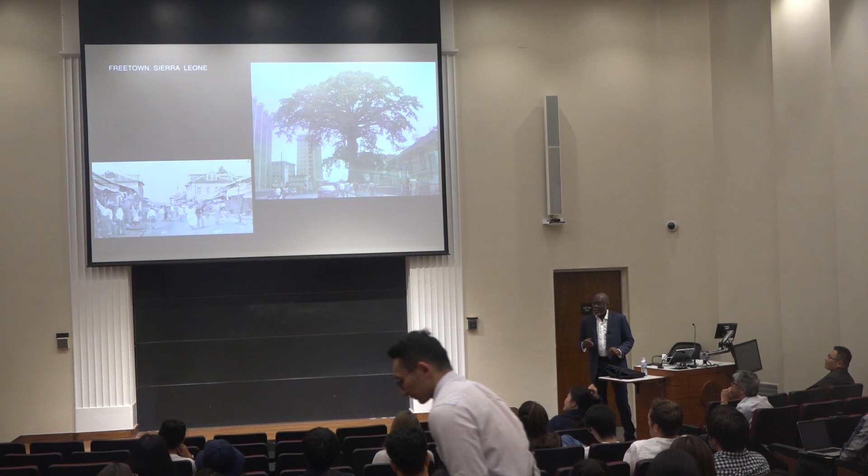I grew up in Sierra Leone, primary school in Sierra Leone, and I remember one time I had a fight with my brother, and we ended up destroying the ironing board in the house. So I spent a week drawing and making a new ironing board for the house. I thought my father was going to kill me, but he got back from the office, saw me putting this thing together, and he just joined and helped me put it together. Now, small things like that, as a designer and a creator, stick in your head.

Design to me is not just about fancy drawings or the idea of space and the usage of fill, colors. It's a lot more than that. And it's fascinating in my older years working in the States, trying to see the difference between Europe and America and some other parts of the world as well.

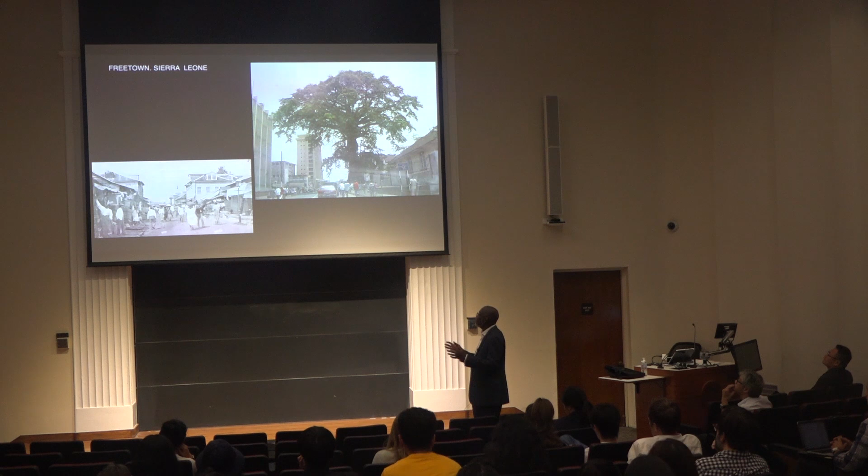My early years, this is Freetown, where I grew up, in the late 60s, early 70s, and the center of town is this cotton tree. It's always fascinated me that the whole town of Freetown looks up to this tree. As a young man, when it starts raining, it was a space for people to congregate, and when it's too hot, it's a space for people to congregate. Most of the buildings back then were sort of quite low. This was nature creating a space useful to people without any interference from human nature, apart from the fact that there's a building surrounding it. And it's still there at the moment, still a symbol of Freetown.

I did my secondary school in Lagos. I thought I was the hippest guy in town, always with my bell bottoms and afro, what it was like in the 70s. But growing up in West Africa, there was no hint, not a single hint, of you not being able to do what your dreams are, of trying to achieve them. You were always encouraged, and people were always striving to actually achieve their ambitions.

Now, I went back to the UK at the age of 16, and all my troubles started. Because in 1978, in my class of 72 in structural engineering, I managed to get into a university, because there was only colleges, polytechnics, and universities, and you had to get into a university if you did A-levels. I didn't do A-levels, I did a diploma, because every black person was pushed towards the colleges. They wanted you to be joiners, carpenters, bricklayers, but not professionals. But I was determined to be one.

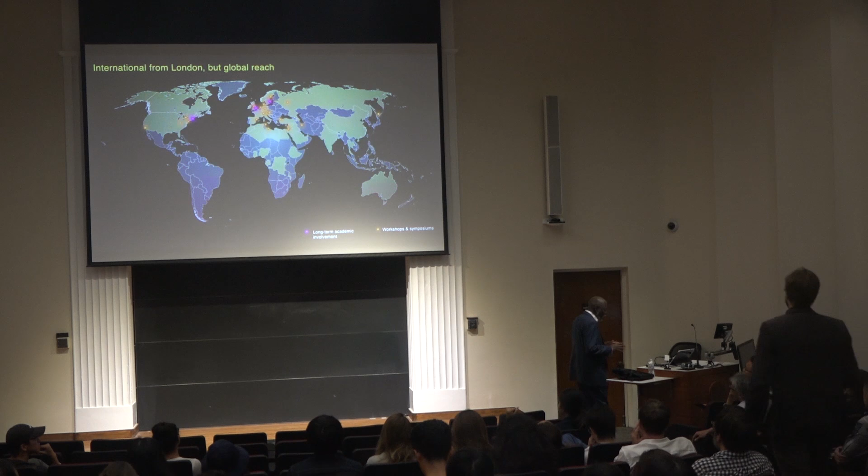As a practice, we actually run a unit at Harvard, an engineering and architectural unit. We're also at the AA, KTH in Stockholm, and always get invited to a number of universities, but I try and avoid as much of that as possible. My partner, Hanif Kara, does most of that. I just stick with the design.

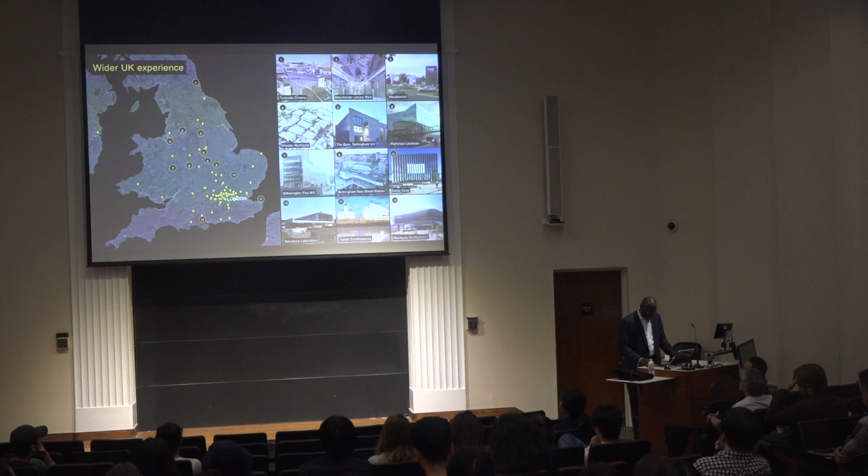In the UK, we're fairly well established, and I will go through this. In some parts of the world, we're just showing some of the projects - the Masdar Institute, Zero Carbon City, Phase 1, where it was actually generating more energy than it was using.

You got electric cars in there - it's one of the very first electric cars. Each one cost 1.3 million. This was before electric cars existed.

I want to use that to explain how I see design. Design for me is not just something that is taught at an institution. It's about who you are, how you see life, and how you experience not just life, but the spaces and people around you.

Understanding the wider ambitions of a client - as designers, you have to go way beyond what the client is asking you to do. You have to go way beyond the visions, and even what your lecturers are asking you to do. You have to be very true to yourself in your approach to design, and that's something I totally believe in.

I'm just going to go through these quickly - these are some of the projects I want to get to.

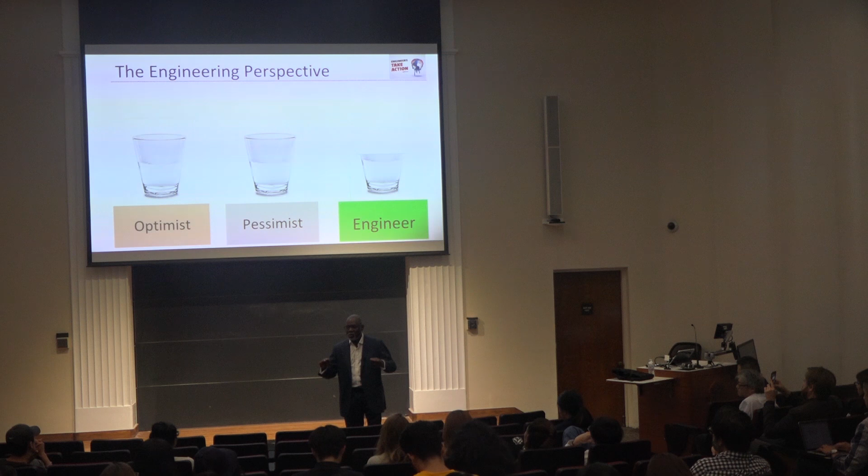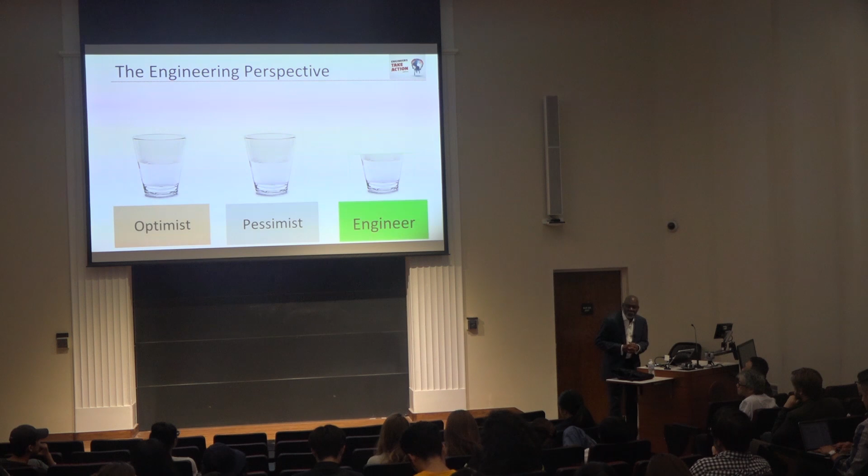As an engineer, you have to question everything. You have to be prepared to question everything - prepared to question clients, prepared to challenge the architect, prepared to challenge the codes, because people and society use the codes as a way of being super lazy. It is the lowest common denominator to do something, not the highest standard of how you do things. But people refer to that as a way of not making things happen. If you want things to happen, you have to be prepared not to be that way. You've got to be more level-headed and question either way.

Now I've got about four or five projects to try and explain some of these issues. I got a call to actually attend a meeting in San Francisco with Larry Page.

I thought I'll start with something in your neighborhood. I know it's quite a few miles down the road, but I suggested to actually come and do a master plan and design with Thomas Heatherwick and Bjarke Ingels to look at how we can create hospital quality spaces for his staff. It was to look at a series of domes. He'd been told he could do a kilometer dome with an ETFE layer.

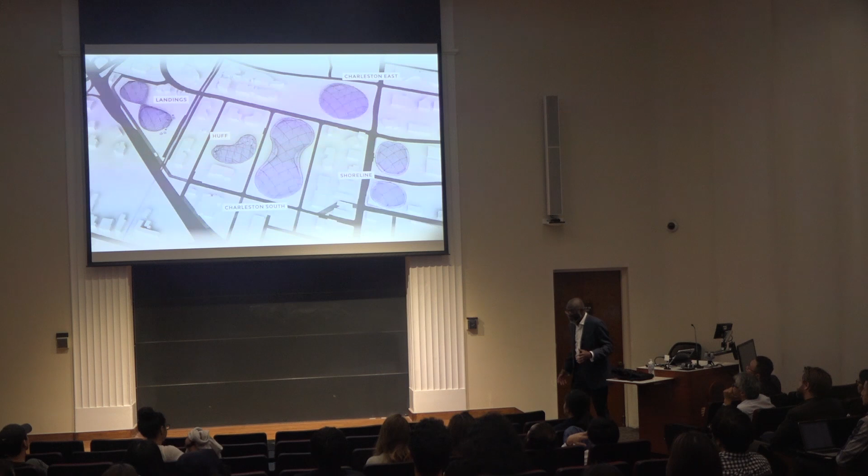This is where engineers will let ourselves down. This was to look at a number of domes, and the total area was something like 7-8 million square feet, quite big, on a series of domes — about 700,000 square meters, or thereabouts.

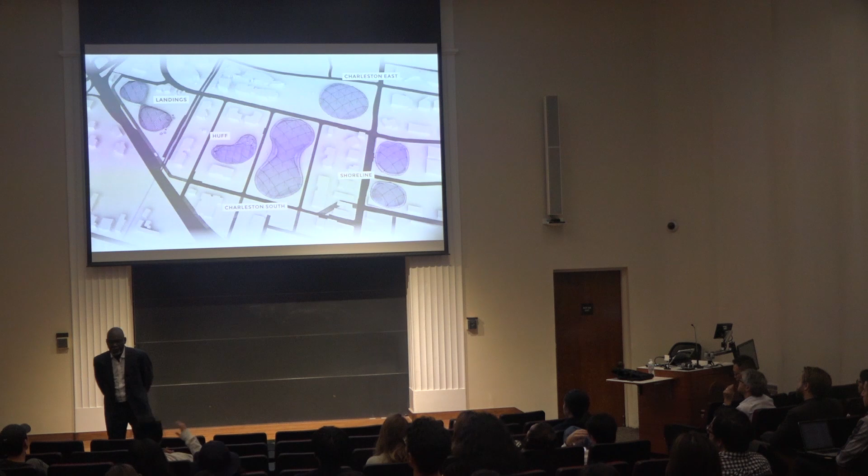So we started working on it, and it was clear that the information he'd had for a very long time was wrong. First, nobody questioned why you should have domes. On the West Coast, you guys have got some of the best air quality in the world, really, for your towns and cities, this mountain view. But he still wanted hospital quality, and that needed to be challenged.

For about 7 years he'd been told he could do a kilometer dome with layers of ETFE, and I just told him, no, it can't happen. It can happen in another 25 years, but right now we haven't got the material, the engineering, or the know-how to do it. That didn't go down very well, but it was a good starting point.

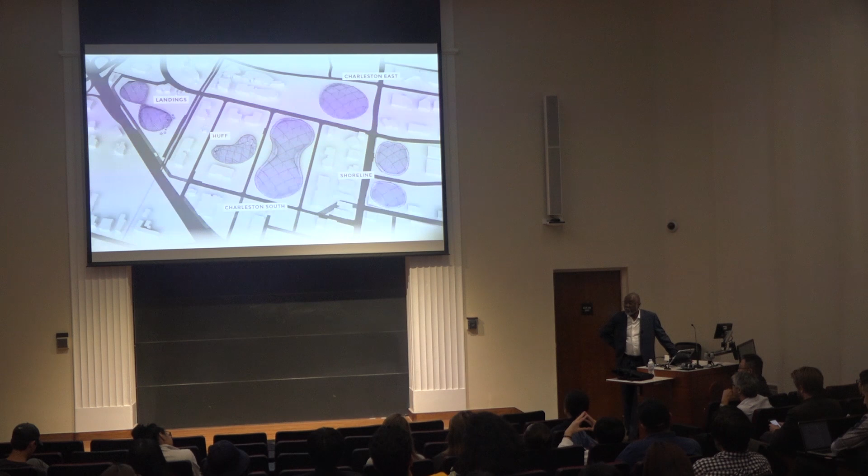We end up — and the idea was about Mr. Fuller's approach of trying to create this mega dome where you can have everybody inside it — it doesn't work. It's not sustainable. The energy you need to hold something like this up is just off the scale. And the implication to the substructure, to the ground, is also immense, which you don't see in beautiful sketches like this. It's an idea. Reality's got to come into play. But that doesn't mean you cannot attempt it.

So we were looking at domes, and we were asked to look at — we did a master plan for all of it, and then we were asked to look at about 2 or 3 of the domes, and this was one of them, Charleston South, which was the first one.

I'm going to be a bit naughty — I'm going to name some of our competitors. We were told very clearly that our partner is going to be Arups to deliver our design, and they struggled.

And the issue here is that you need to work in collaboration, and it's not in the DNA of your industry in the US at the moment. There's a really massive divide between the architect designers and the engineers. Trying to get them to actually sit down and work together is pretty difficult. Anyway, I'm going to go through this very quickly so you can see the way we think — the way I think, the way AKT thinks.

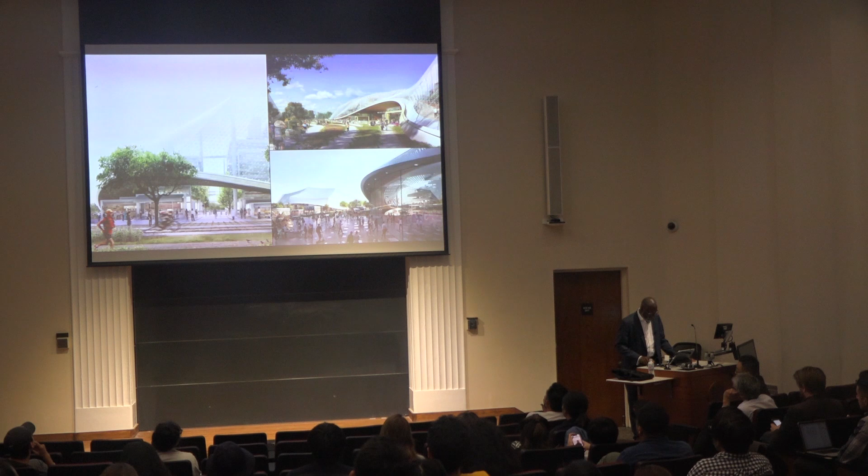15, 20 years ago, trying to convince a developer to keep a building was a nightmare. So we have to change our approach to some of these. But what they were proposing internally looks incredibly beautiful. But I would hate to actually go back and do the energy calculations on this - it was off the scale. So our task was to actually go through some of these and see our possibilities.

Working with our p.art team, we actually went through a number of approaches using in-house written programs and scripts to see how this will perform. Sorry, it's not doing what it's supposed to do.

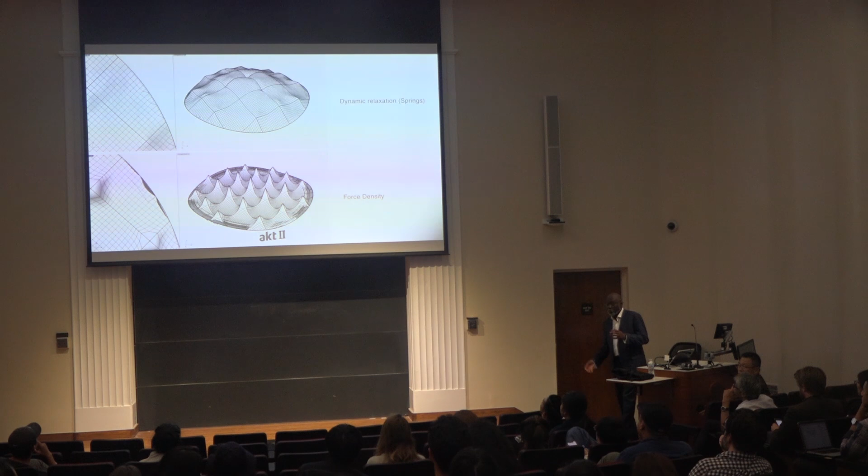So what we tried to do was look at dynamic relaxation as one of the options, and force density - too much technical stuff, you don't need to worry your head about it. But the whole idea is, how do we relax this thing so that the amount of force we need to create the form is minimized? There's a lot of criteria to make this work, but how do we make it as little as possible? Because when you create a tension member, you need a counterforce to hold it in place. And the implication on that, as I said, on substructure was huge.

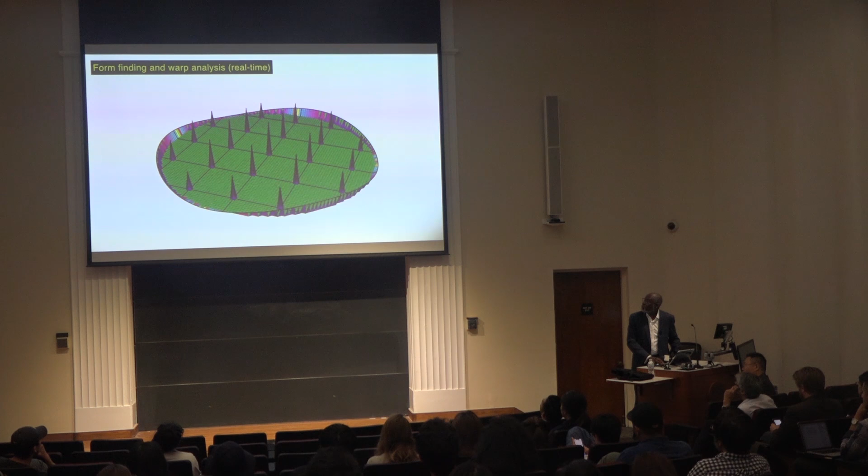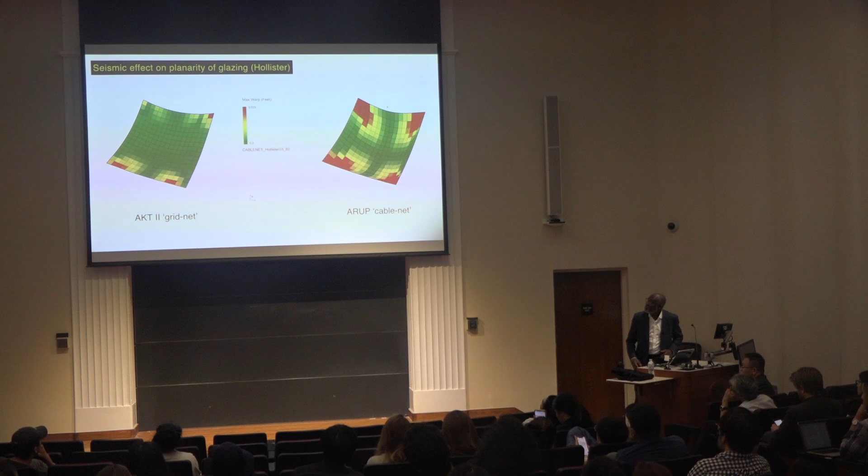So we went through a number of processes, also to reduce the stress diagram. The red areas show the higher stress areas. How do we change the geometry we were given by the architect to minimize the amount of force we're using to create the shape, which means part of the geometry changes - but I don't think that's too much of a big issue. So we went through all of that, not just from a micro level, but also a macro and a micro level, in terms of how we change the idea of a tension structure.

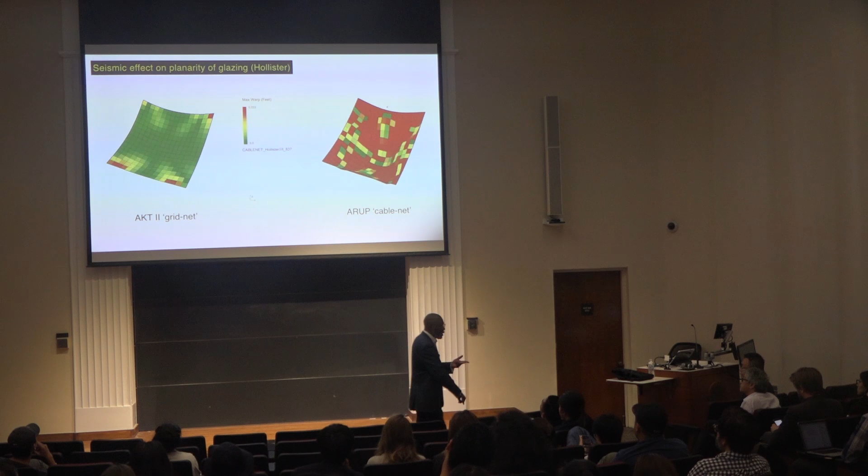So on the right is a cable net. On the left is something we call a grid net. What we decided was, rather than using cables, we use flats, because by the time you align the flats together, it actually has more stiffness, which means it's part bending and part in tension, which means you're minimizing the forces and the energy in the system.

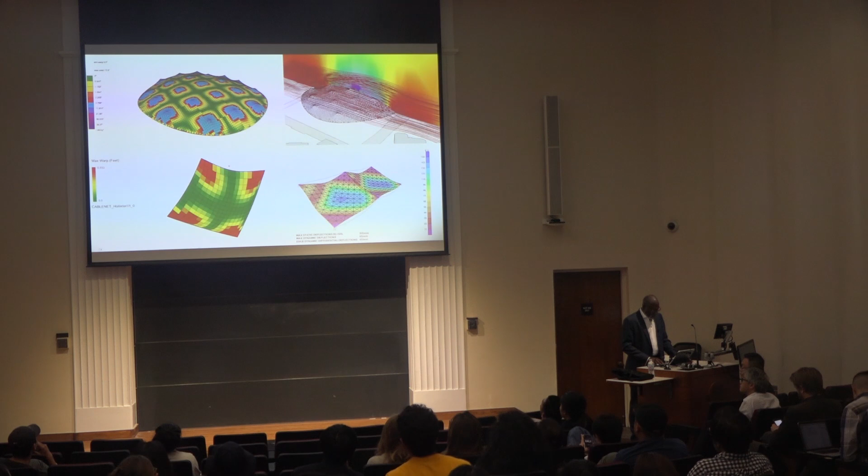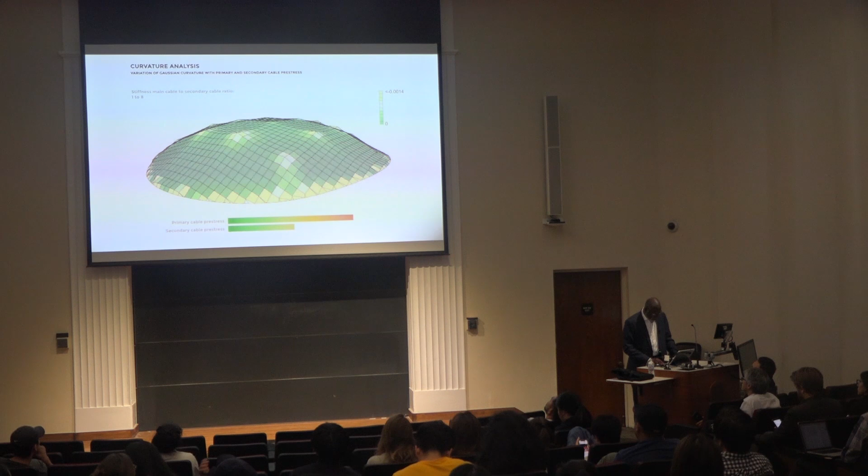And we had to go through all the usual analysis - wind analysis, left, right, up and down, different kinds of forms to make sure, as you can see at the bottom, the amount of force you need to create the shape. We presented all this to the client to say, look here, as soon as you create more force, you're using more energy. If you're using more energy, not a good idea.

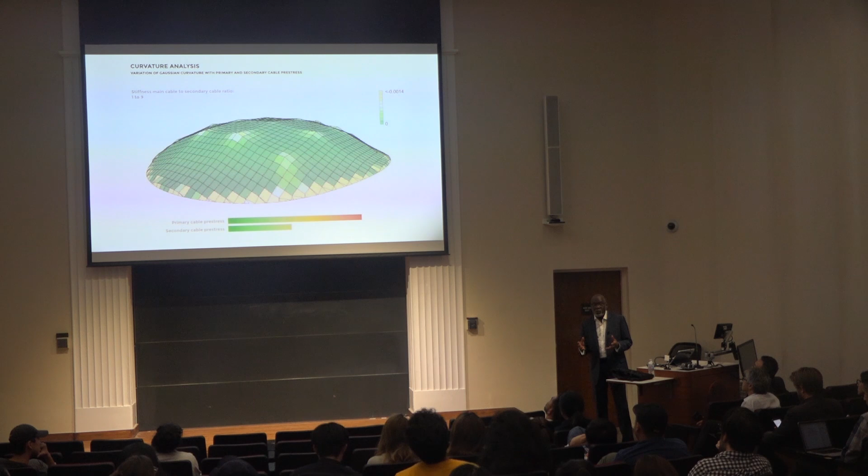So rather than playing the black art or the black magic of structural engineering, which is what a lot of engineers do - you say to them, I need a beam across this space, they say it's going to be this deep, it's going to be that long, and nobody questions it. Why is it this deep? Why is it that long? Why does it have to be rectangular? Why can't it be twisted? Why can't it go like this?

We don't - and I'm sorry to say, in the US, they don't question it enough. In Europe, you have to actually give your reasons and let people understand more and more what you're trying to do and why you're trying to do it. You've got to be challenged.

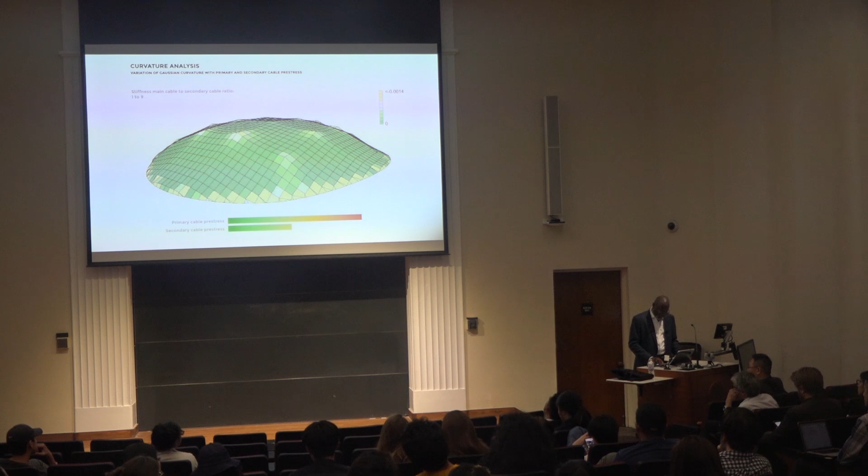Moving through quickly, we went through all of this - these are some of the details on the cable option. By the end of the day, we abandon it, because as soon as we convince the client that it doesn't quite work. So we spend about 6 months working through all of that.

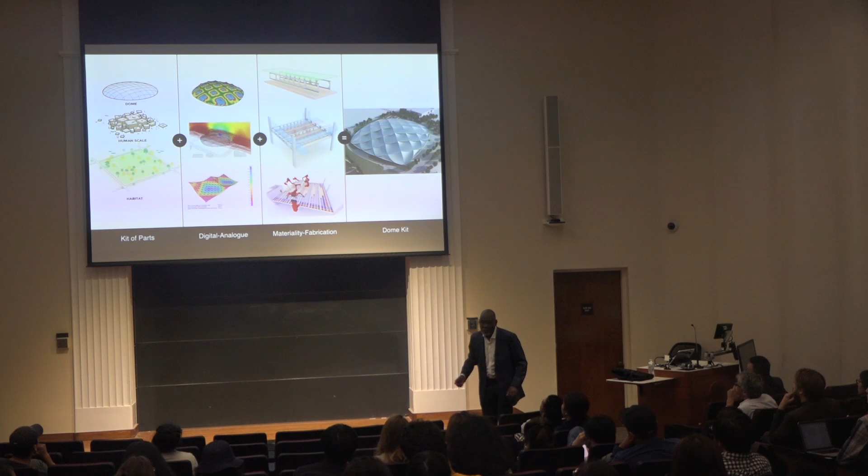We spend about 6 months dealing with all of this, and then we spend the other 3-4 months, and this is what we ended up with. To actually bring the light levels down in this part of the world, it's something like 6 times what it's like in Europe. So you have to bring the light levels down, manage solar gain, and all of that. We end up with, forget about the clear structure in glass or ETFE, we end up with solid lenses of light coming in, which actually created a beautiful space.

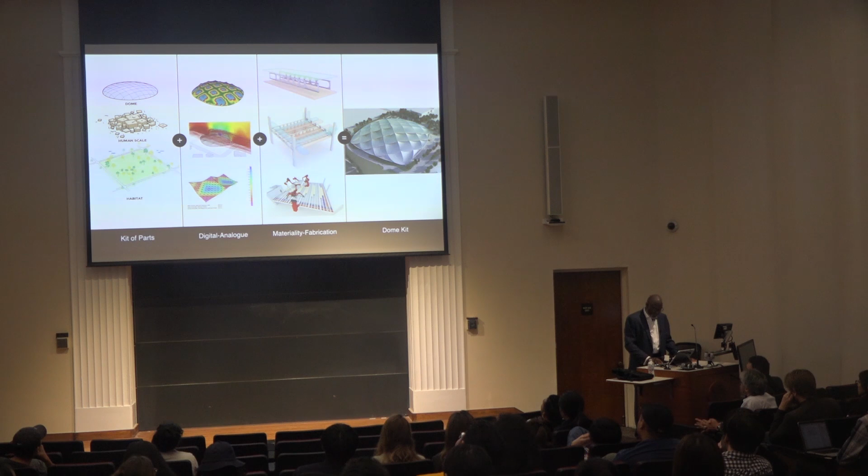Went through all the usual analysis, went through the usual materials. We tried to do it in timber, but the area in the floor plate was too big. The other thing is sustainability - you have to use materials for what they're good at. I read in the press about people trying to do the tallest tower in timber. That's its biggest folly. Timber was never made to do more than 10 floors, because the amount of steel you then have to put inside the timber to work in composite with it makes no sense.

But we can all write and put something in the press to say we've done the tallest timber building. Sorry, I'm not an advocate of them.

Again, this is looking at design in a holistic way. The client on this rang me and said, look, there's this site with a building built in 1976, brutalist, on the market, down to the last 4 bidders. What do we do with it? There's planning permission to demolish it and put 5 mini towers around the site. So would you come take a look at it? The original engineers, who I won't name, did the assessment for it.

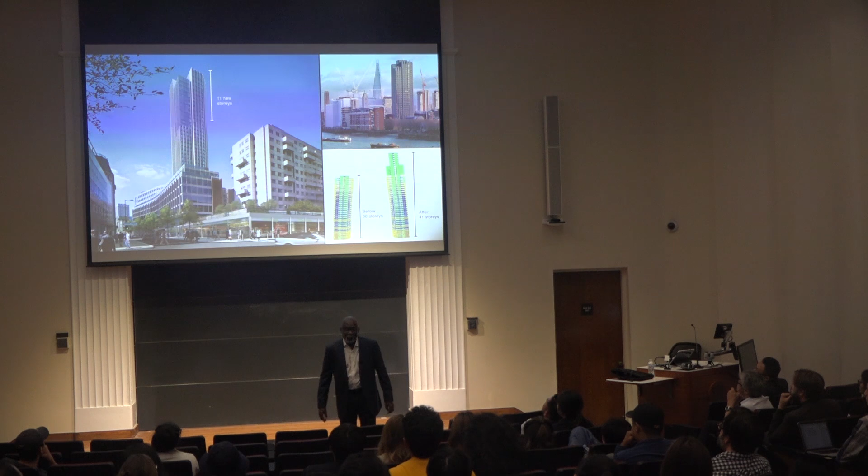I love this project because we had to convince the client that we could put 11 stories on a 30-story tower without demolishing it, which is 30% more. Everybody got excited about that. But the lower building is 6 stories, and we added 3 onto it - 50% more. We did not touch the foundations.

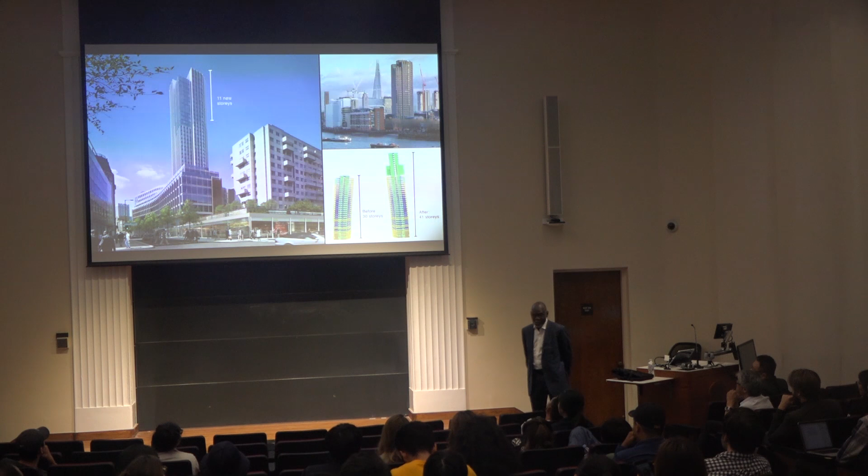We only strengthened columns where we created double height spaces in the lower areas, and the columns in the tower, we did not strengthen any of them. We even cut holes in the core to convert it from a commercial core to a residential core. So what we ended up doing was with this existing building - you can see the T-shaped building next to it - it's all commercial, the whole thing was commercial.

So all of this and all of this is the site - the whole thing was offices. What we created was: the same area you've got here went into this level, which means from this level here all the way up became residential. And all the lower areas here, for the big axis, became retail spaces, a destination space.

So we convinced the client - I first said to him when we went, he asked how many stories do you think you can add? I said 8, give me 24 hours. After a while he came back and said the figures don't add up, can we do more than that? I said well, we haven't had time to do the numbers. We did the numbers, and to tell the truth, he could have gone up to 13.

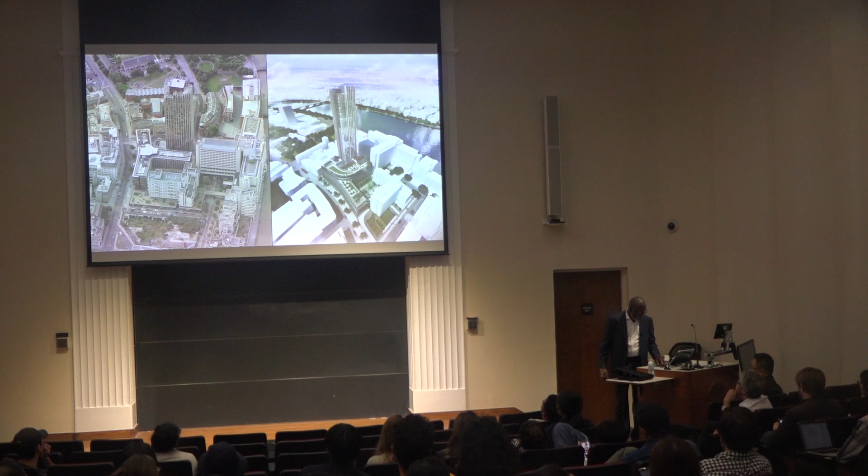But actually changing the load path and understanding how engineering worked back in the 70s - it's built, it's up. Why? The architects are American architects, KPF, and we work very closely with them. But why? Why do it?

There's another one we're doing at the moment - sorry, because I really love this project - which is a 17-story building, and we're adding 13 on it. Again we're not touching the foundation, and that's on site at the moment. We're increasing the core.

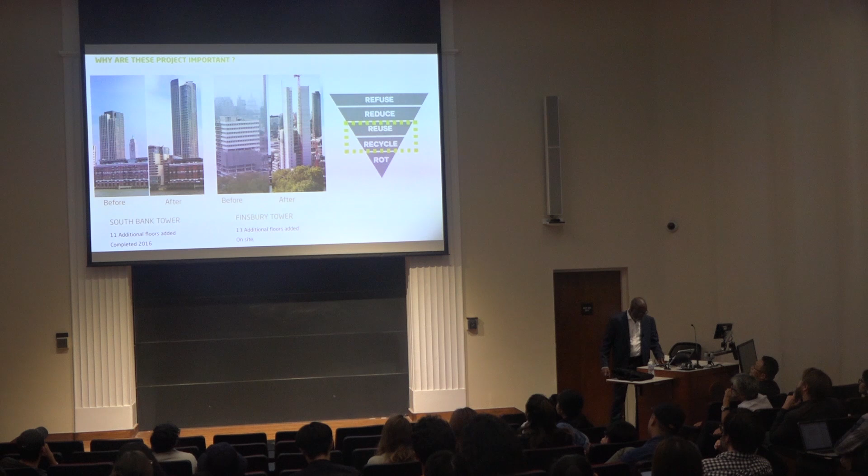Look through the existing, understand what was done, understand the vision. We spent a lot of time understanding the vision of the original designers, a lot of research. Why did they do it? What were they trying to achieve back then? What kind of building was he trying to do?

Now what we have to do is adapt buildings. Everybody talks about, I'm sure some of you are going to qualify and go into the industry, I guarantee you they're going to be talking about wanting a flexible space, a flexible this, a flexible that. To me that is ridiculous. Why spend the time, money, energy to do a space when 90% of the time it never gets used for the flexibility? What we should be talking about is adaptability.

So if I decide that this hall is not big enough, I'll knock that wall down, I'll redesign the corridors, and I'll make it work. I'll get the engineers in and I'll make it work. Why spend the money and energy to create this wonderful wall, put big structures in there, make it so you can blow it off in terms of flexibility, and it never gets used because 80-90% of the time, flexibility never happens.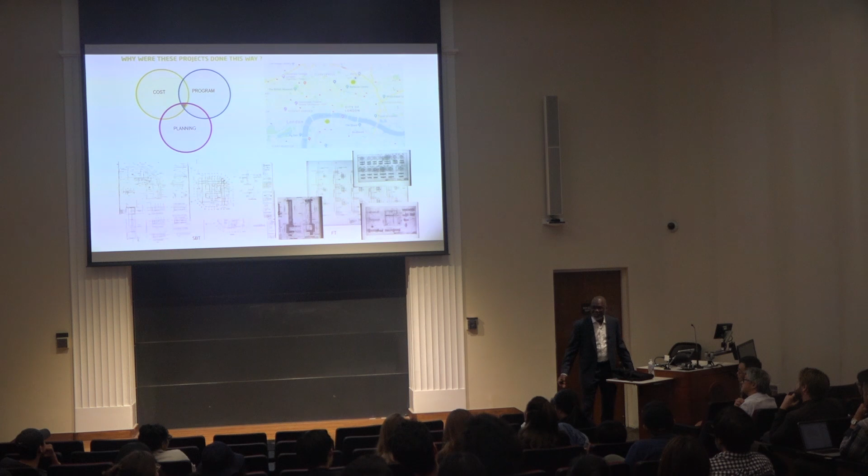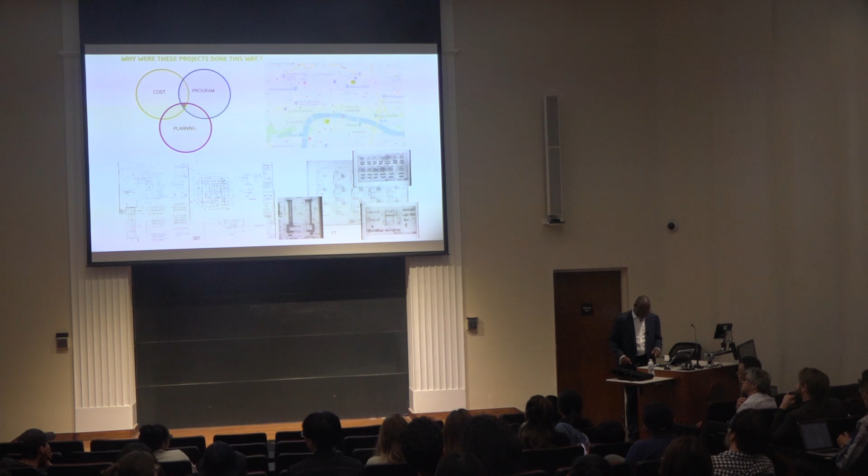So it is the most stupid statement we use in our industry from a design point of view. So my view is, change that word. So what we did was we...

Post-tension the existing core, not by putting cables in it, not by tightening it up or anything like that. We just dump more load on it. We dump more load on it.

Because when it was built back in the 70s, they used the core to support the building. So the lever arm was the core. So what we did was we changed the core by having every single floor act as an outrigger, so that the external columns and the core are working together by increasing the lever arm.

By dumping more load onto the core, which was designed to go tension, compression, tension, compression, it never goes into tension any longer. Concrete is beautiful in compression. Concrete does not like tension. The only reason you use it for tension is you pour a lot of reinforcement in it to make it work. Stupid, stupid, stupid.

Seriously. So by having this dialogue with the architects in terms of what they were trying to do for the future of it, we had the biggest row. I had the biggest row with the contractor, which was Mace. So much so that I was having a shouting match with the chairman of Mace at a meeting, because I told him, not in so many words, these guys were morons.

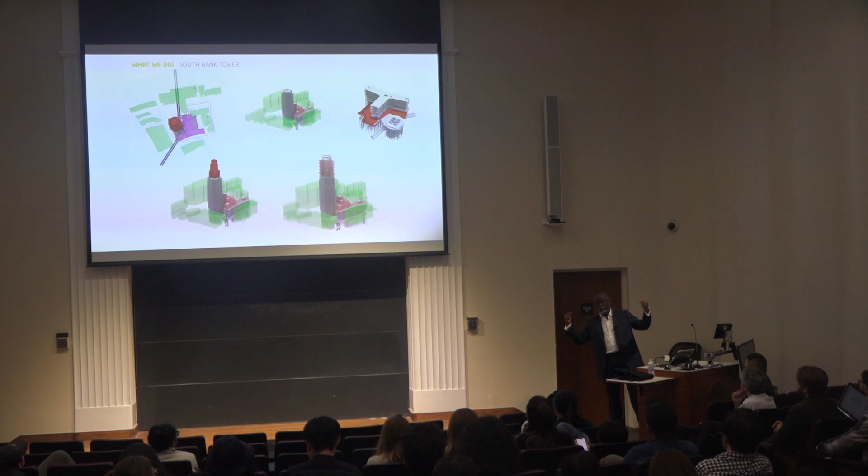Once it's built, they use this as contractors to say we are now the number one engineering building contractor in London because of this building. So I do believe as designers, we are in a position to help change the thought process of the industry.

I was dragged to a planning meeting where the borough next door, Westminster, objected to this building, not from a planning issue case. They said it was a piss take. It was like an April Fool's Day joke.

Trying to do a tall building in Southwark opposite Westminster, they said it was not possible, that the client and the borough were taking the piss against Westminster. And the borough said, yeah, we've got a finger up to you guys, we're the next borough across the river.

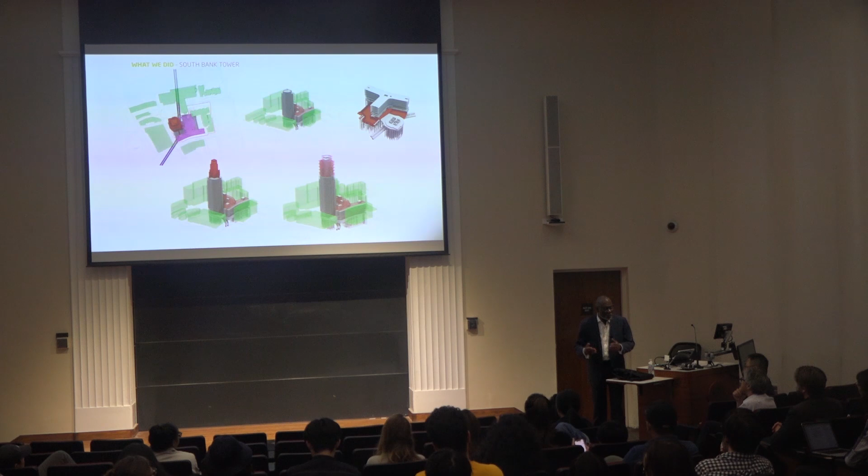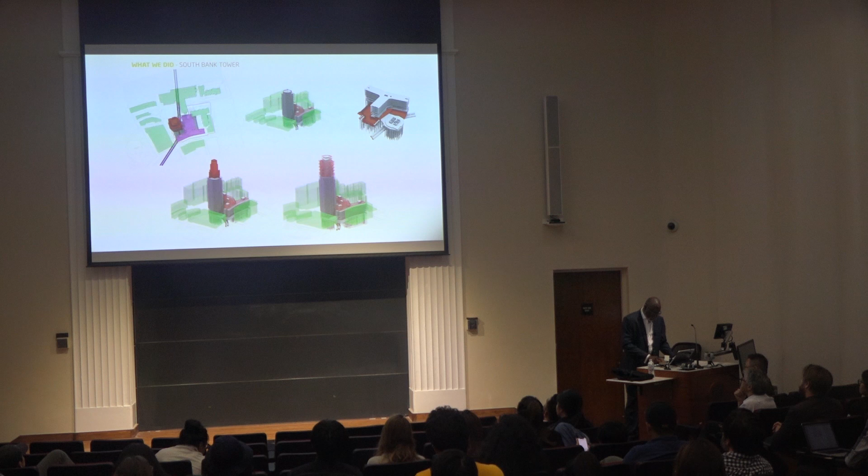But it was real. So I had to go and explain that, no, we are actually going to do this. We are going to make it happen. So I do believe as designers, we do have a thing to do.

So this really simply explains it. So you've got the core, and rather than the core doing all the work like in the original, this just shows the force diagrams, and this shows the complete picture. So you can see the original force diagram, it's got some tension. This is if you use the core, and again you're creating a huge amount here.

But by actually increasing the cantilever arm all around it, you actually keep everything in compression.

Right, so we keep everything in compression. By the way, we had a tube tunnel underneath as well, a small port. It's all on piles, but we did not touch the piles because the capacity we designed the piles to, again, is criminal.

A lot of wind analysis, and this gives you an idea of the carbon footprint. This is South Bank Tower, and we've used this to give us some relative references. So AKT's footprint, air flights we do, how much meat we consume, average city worker, our computers—you can see the difference, and the amount of carbon saved.

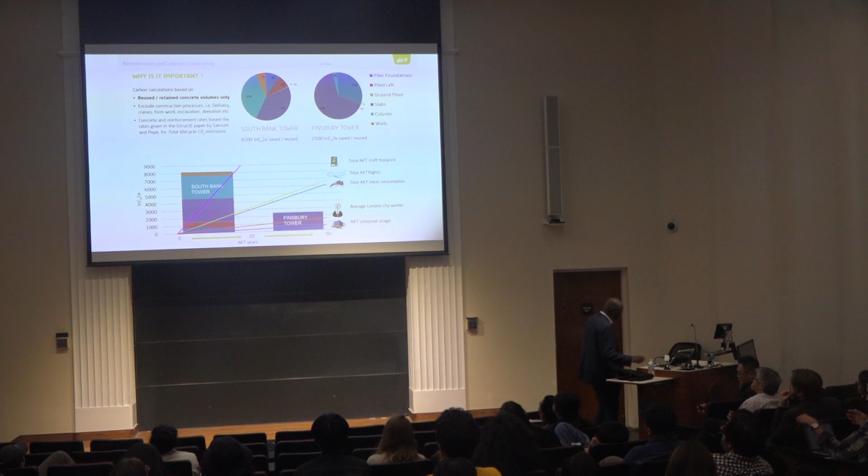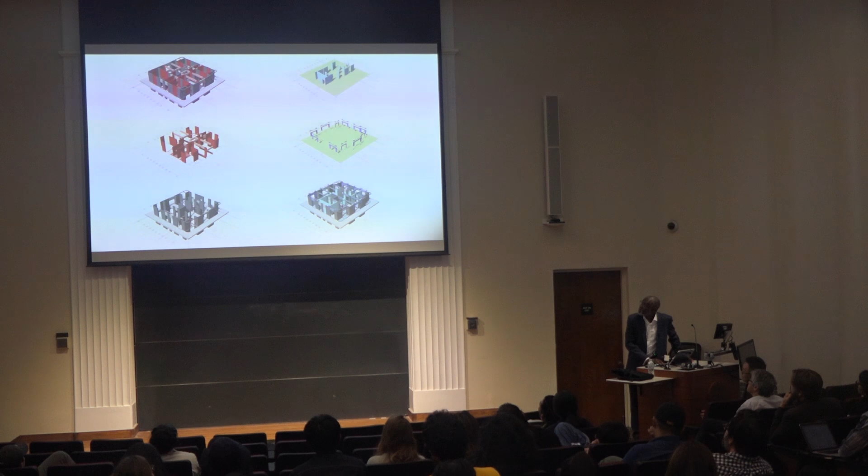This is the core, quite fascinating actually. We took the original core, in red, and literally tore it to pieces, added some new bits to create a toilet and kitchen in those spaces. The reality was we actually made it stronger, at 107% from the original 100%.

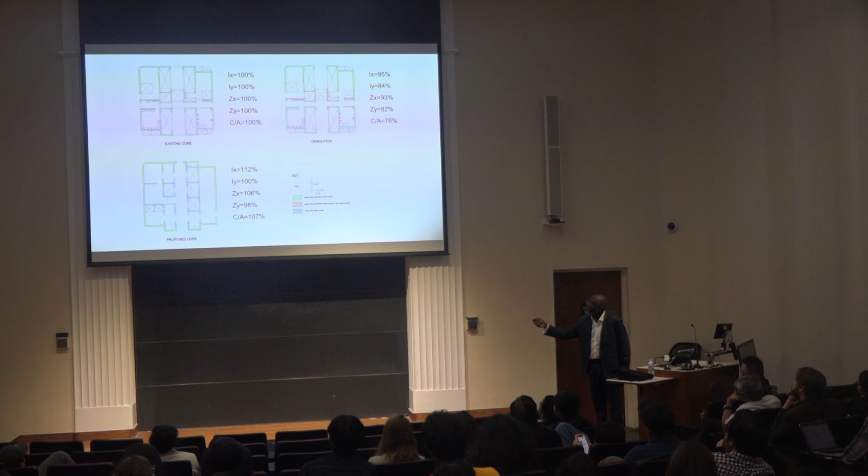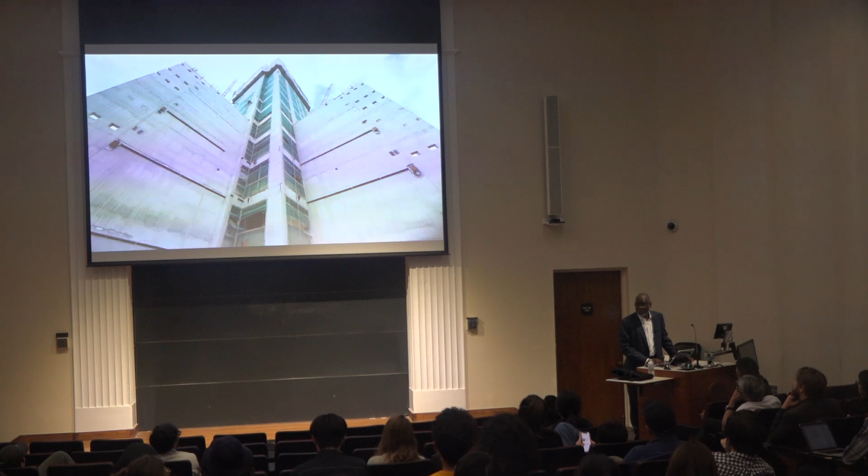So anyway, this is it going up, as you can see. I'm not joking why it was going up—London thought it was a piss take. They did not even believe it was going to happen, but it's done, it's finished. This is the final product.

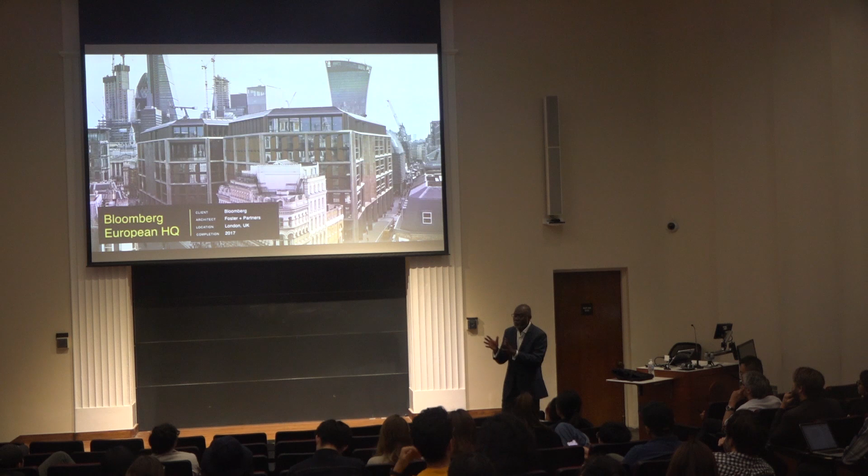The internal is beautiful. I can remember the Channel 4 TV rang up and said, 'We'd like to do a program on this thing and have it on TV.' The client got so excited, and he rang me and said, 'We're going to do this program.' I said no.

I said, 'You're selling some of these spaces on top for a lot of money. How would the client who's bought this beautiful apartment feel, sitting there knowing very well that next to him there's a tension pile holding the whole 11-story extension together?' They don't want to know how it's built, they just want to know it's built. You don't want to tell them how it's done. So we decided not to do it.

This is Bloomberg. I've put this one on because it's got an amazing design story. Michael Bloomberg decided that he wanted, in the city of London financial center, having done his business very well, to create a special building. Norman Foster was the architect, and the chief planner of the city said, 'I do not want another Foster building.' Norman Foster said, 'I'm not going to give you another Foster building, I'm not going to give you steel and glass, I'm going to give you something else.' And he did.

Technologically, this is the first office building to hit BREEAM and LEED Outstanding. The technology in this building is amazing. But when you've got a client that's prepared to spend over £1 billion on a 1 million square foot building...

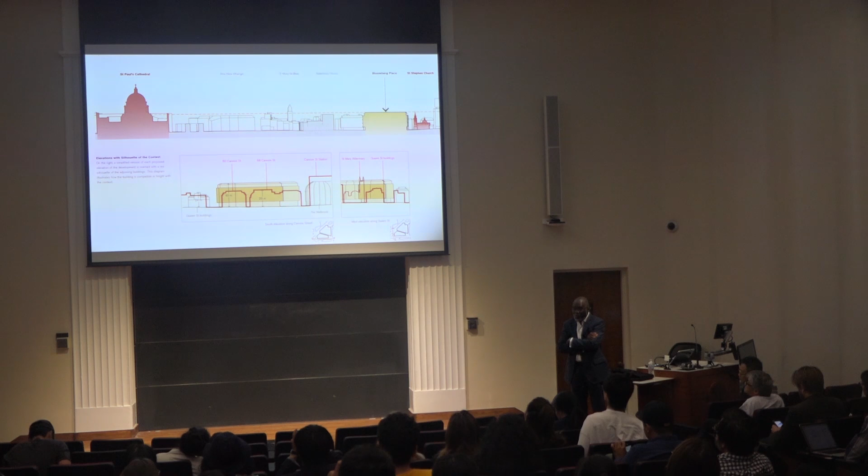People will question that, say why are you spending £1 billion on a 1 million square foot building? He's got the money, let him spend it. If he's going to use technology and funds to actually create a sustainable building, go for it. Why do we, as designers, have to think cost should be a reason to do a bad design? Whether it's 20,000 or 200,000 or 200 dollars or pounds, if you're going to do a piece of design, you better do the best you can for the amount. It's not about the money, it's about how you're trying to create something that is sustainable and environmentally okay.

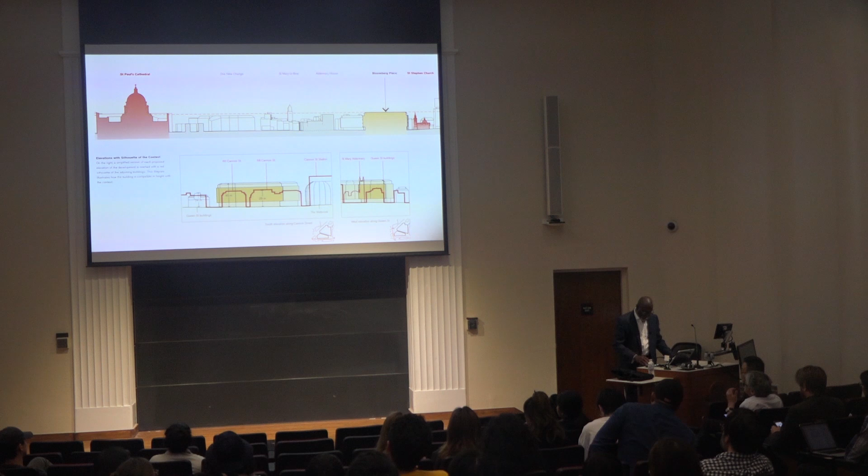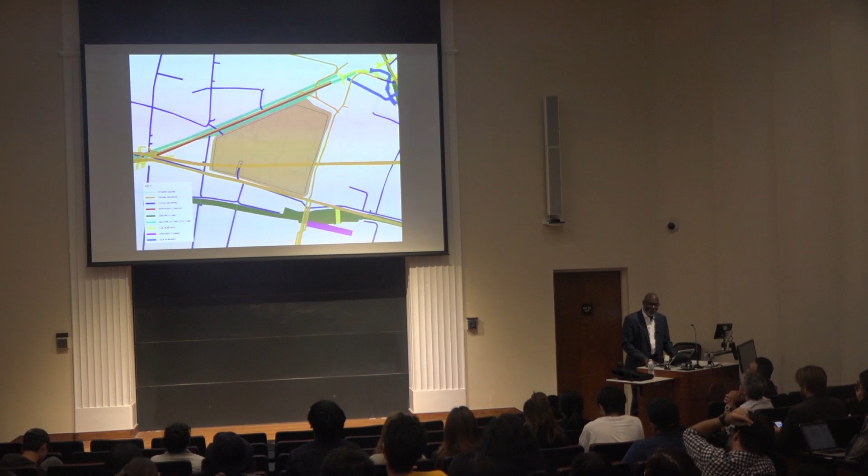So the trick, the beauty on this one—this job started, oh boy, a long time ago. The practice was 50 people when we started it, so something like 12 to 15 years ago. I can remember I rang the client, the development managers—we like to work with them—and they said, 'You're not going to work with us until you're 100 people.' It's not about size, that was my thing.

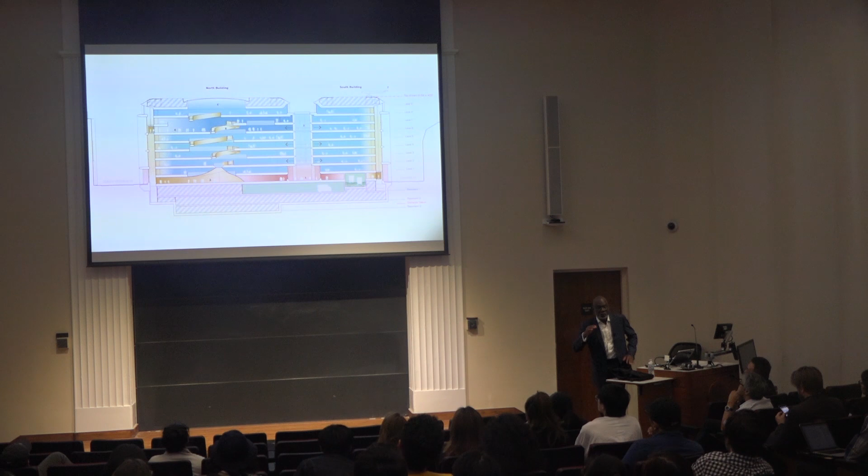Now, the most beautiful thing about this building is about 10 floors. We also preserved the St. Paul's view—the views in London we cannot go past, and we preserved all of that. There's a huge amount of analysis done in terms of windows. It's actually quite passive, you can open the windows.

It's got a very sophisticated environmental system. We use vacuum toilets, the least amount of water per head—it goes on and on, the accolades go on and on. The light levels—we use tiny little LEDs to beautifully diffuse light, so glare and all of that is dealt with. Having said that, the facade cost per square meter is the same as a 5 Series BMW per square meter.

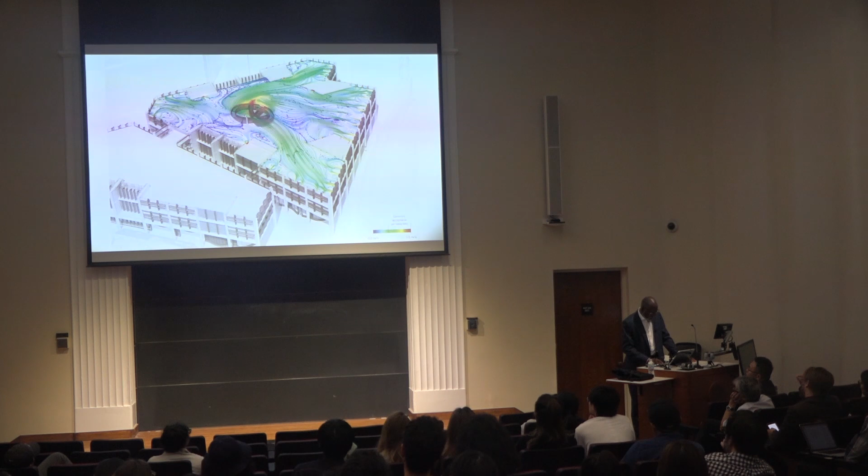So a lot of analysis was done—bronze, hand-polished facade.

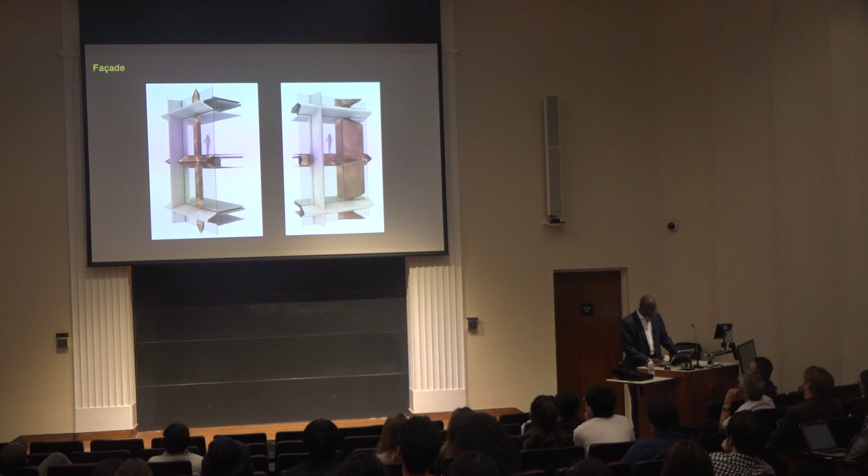This is what it looks like. This is an old street that was re-established.

We had archaeologists on site for 6 months, exactly where it's got the biggest amount of Roman artifacts that came out of the site. Not only did we have that, we also had a Roman temple that we had to move from one side to its original position and bridge over it.

We also had to solve the London Underground problem because after the King's Cross fire, they had to double end all the stations, so if there's a fire here you can run there and get out. So we had to create a new station through the building, dig and put a station in, and put a huge shaft, 22 meters down, all the way down.

Now, the biggest challenge we had - these are all the artifacts, and there's a beautiful museum in this. This is the biggest challenge we had.

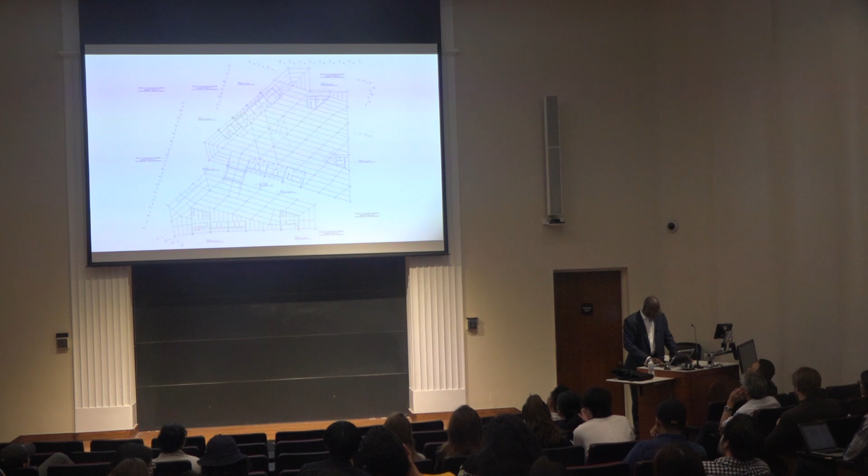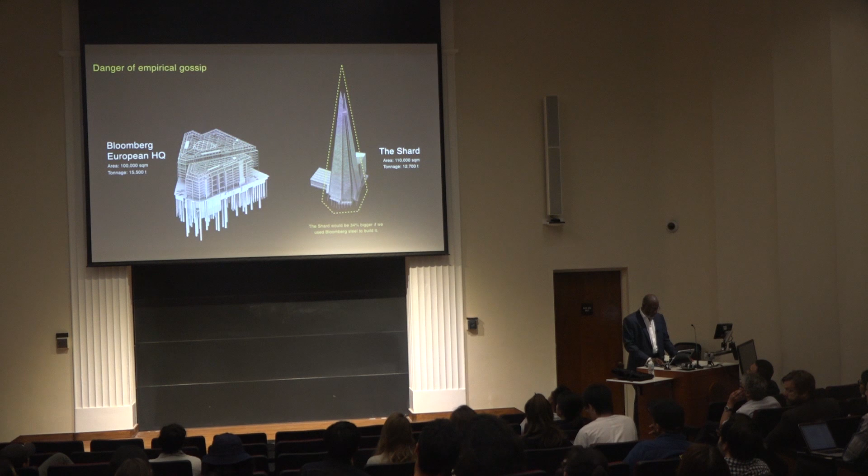Anyway, that's what I like about this project. It's beautiful. It's got some amount of steel we used horizontally rather than vertically, which could have made the Shard taller, so there were some compromises. We did the spiral ramp, and we also did a timber entrance, all formed in timber, a lot of analysis. It looks absolutely beautiful.

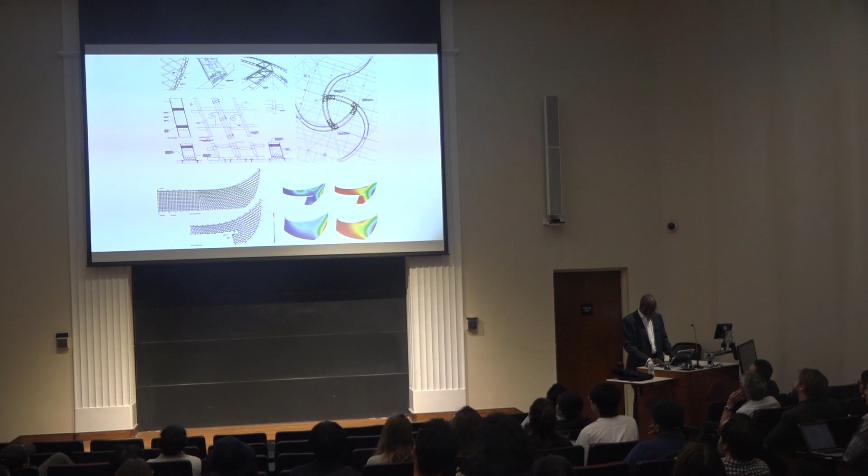This staircase is a double helix, and it's actually only supported in the absolute minimum locations. So the whole thing is built.

And this one is Foster's third Stirling Prize. So Foster's were quite pleased that they won the Stirling Prize three times. And AKT, we've won the Stirling Prize three times too. And we're a lot younger. A hell of a lot younger.

So again, it comes back to the views of St. Paul's and everything. The spaces are just amazing. This is the lighting. I know it's bespoke, but it really talks about where we're going in the future - very low energy usage, tiny little LEDs, very constant lighting, all very well controlled.

And they also create a new public space, a new street. It's absolutely amazing. So if any of you ever end up in London, it is worth just going to the city to see the building and walk around it. It's beautiful internally and externally.

Back to the States. This is the Vessel. I'm sure most of you have heard about it.

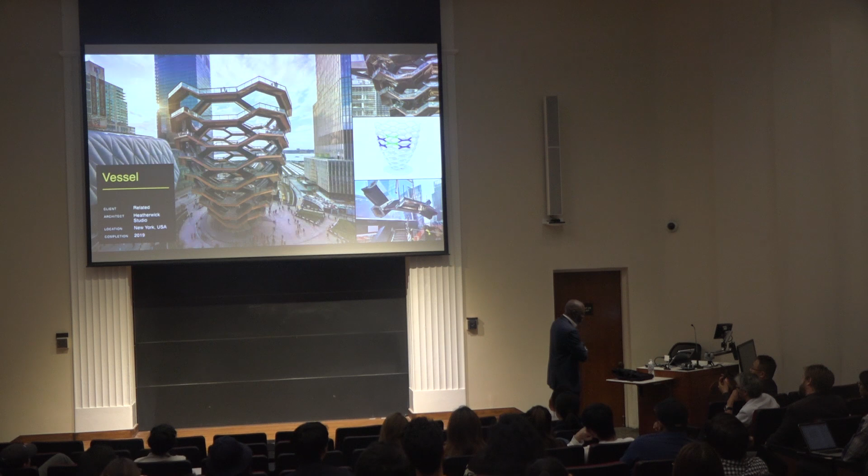But the issue here is challenging the norm, and we end up with a bit of a compromise where we bundle the thing and put the tiniest piece of concrete legs in, which technically doesn't support the building, but it saves face.

And after it was done, it's all demolished and given to all the schools and whatever. But I'm only going through that story just to give you background.

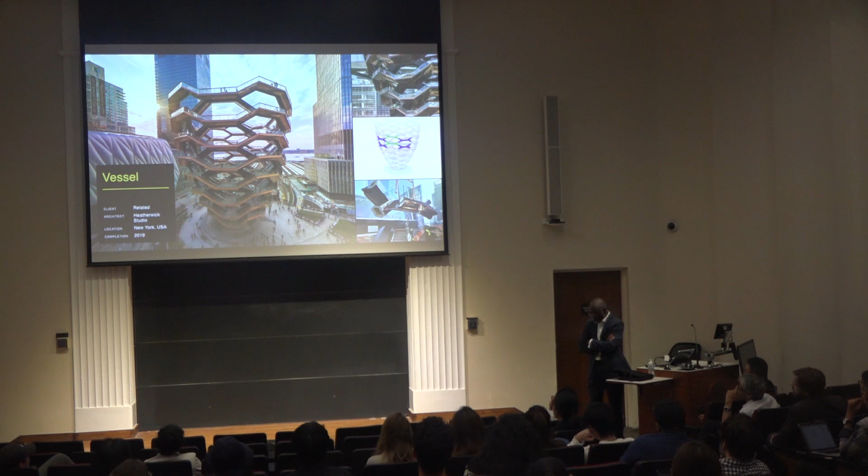This one was very, very controversial from the beginning - Hudson Yards. I got a call to say we're trying to do this thing, and we spent about 18 months doing different kinds of structure.

And the question here is, can we create a space? If you go to Trafalgar Square, or to squares in any city really, you see this amazing monument, and you admire it, you take pictures, you go there. Thomas was very clear - he wanted something that people can actually interact with, use.

So he said to us, can we create this bowl, this staircase? And he drew it up, and I looked at it and said, this is crazy, we need to make the bottom a bit bigger. He said no, we need to make the base even smaller.

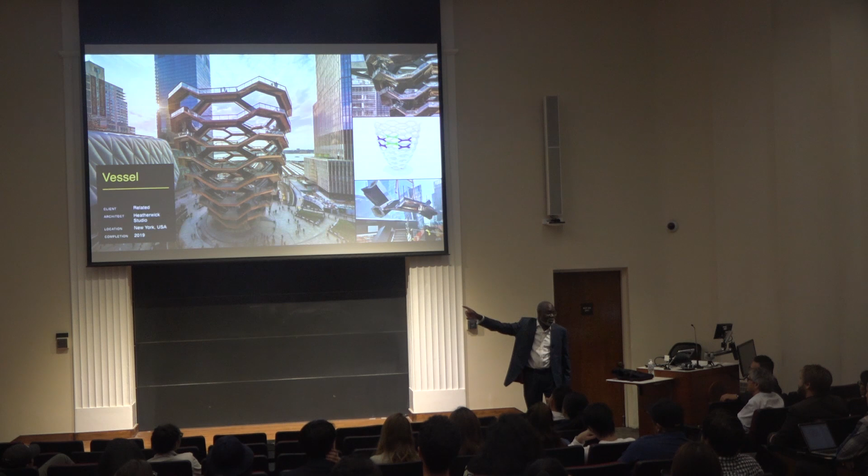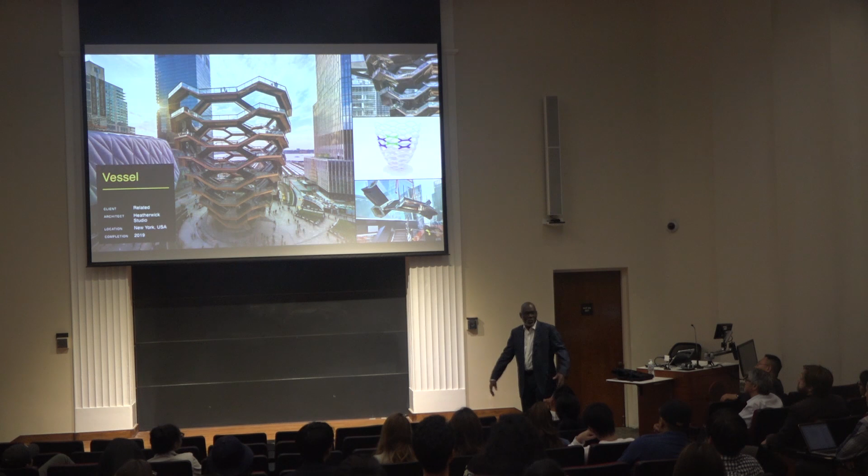I said wow - and remember, this is sitting on top of a deck, everything's on it, so it's not sitting on the ground, it's sitting on a deck. Can you imagine the vibration? The issue was it had to be useful for a concert, riots, people listening to a band.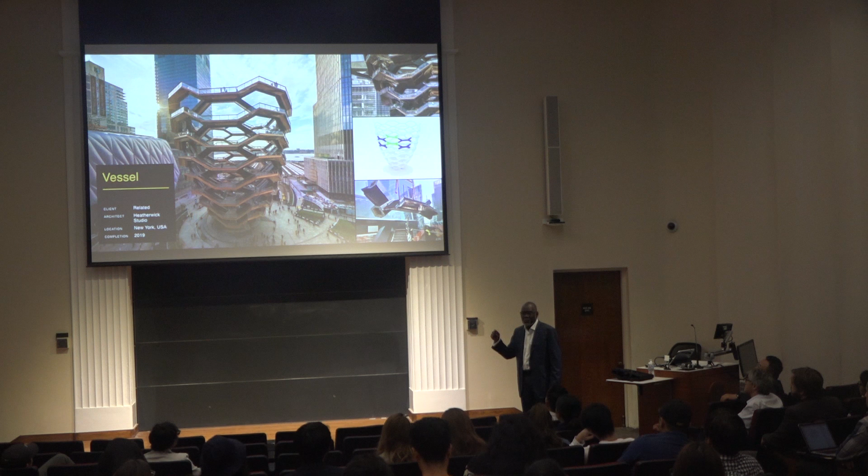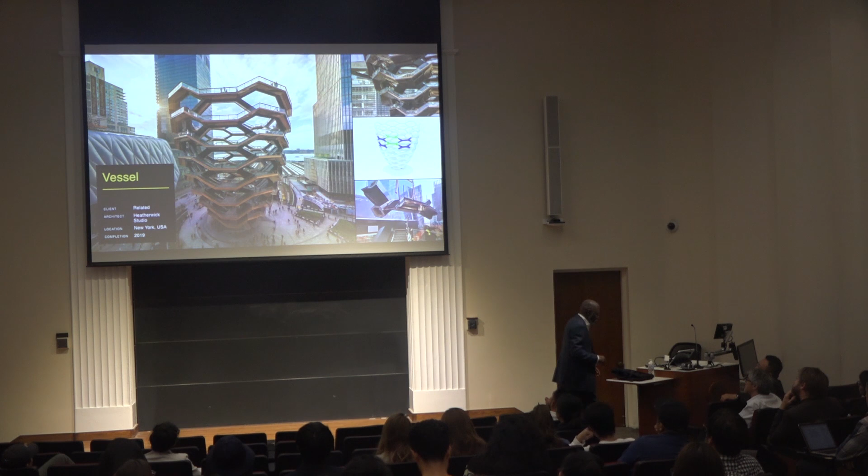It's got 2,500 steps. Going through all the steps is about just over a mile long, about 1.6 kilometers, with 80 landings, all varying in terms of size. So we said okay, we'll give it a go.

This is just to give a background of Hudson Yards, on the right there - this is the opening, and this was the idea. This is one of the early sketches - as you can see, the proportion of this bowl or vessel...

created a lot of problems, because not only does it do that, it's also doing that - when you have 700 people in it listening to, I don't know, Jazzy B or one of these.

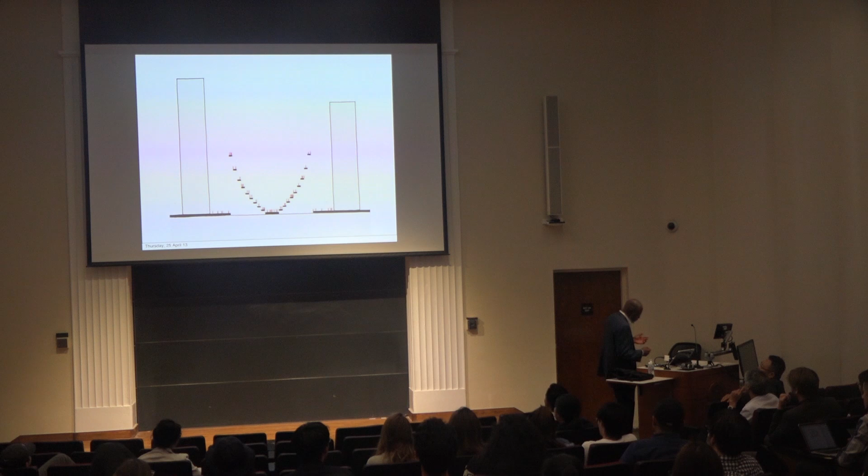So a lot of work was done, but also we had to modularize it so that it can be built. And we had a lot of - let me just go back to show you. So we went through a lot of options to create this sort of T-bone approach.

Everything is fabricated from steel. We had another problem with that, challenging the industry on it. So it was all itemized.

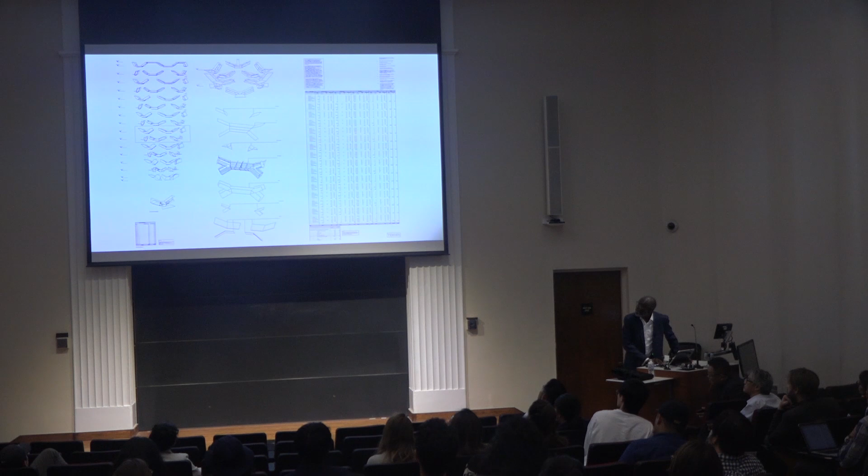We went through full design on it, and the client was very clear that TT was going to be our delivery engineers, in the UK and in the US, to go through all the approvals and everything.

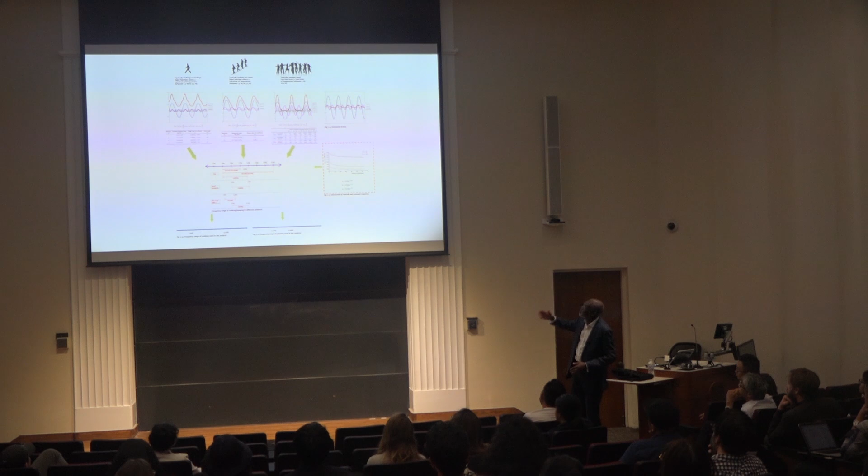So a lot of frequency was looked at - what happens when you're... it's not going to be old people like me, it's going to be young people doing all the dancing on it. We just walk, we don't even stride anymore, but anyway. So we went through all the frequencies and did all of that.

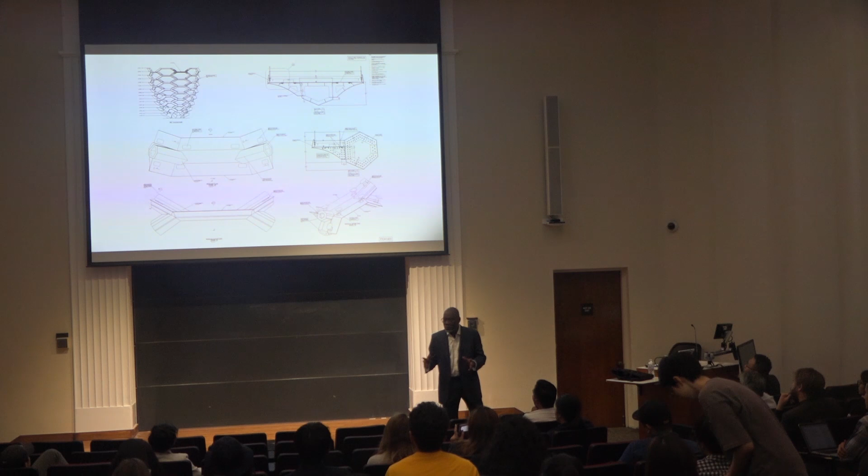And then the shape was the most difficult - we had to create a shape where the shape and the structure was the same. So it's not cladded, you don't get a structure and then clad it - the shape was the structure, the form.

So a lot of parametric stuff was done - Grasshopper, written things. And we also went through explaining how many people can be on it and what it means.

I must confess, these are some of the movement modes. And I must confess, when we handed over our design to the engineers in New York, they shot themselves. When it went to the contractor, they struggled with it.

But the first thing they did was flag something that needs to change in the industry over time, because the contractors have got too much power in terms of the influence they have on the design that's being given to them. They can go back to the client and say, this is all we're offering you - forget what you want, this is what we're offering you. And there's not enough interaction between the design team and the contractors to make sure that what they're offering is close to the vision. It's so apart.

So the first thing they did was abandon the design for a big tube, faceted, and then clad it. What that meant was they could not meet any of the frequencies with the tube. So after they spent about 6 months and a lot of money going through that process, they had to come back to us and say, okay, we haven't quite met what the whole purpose of the thing is.

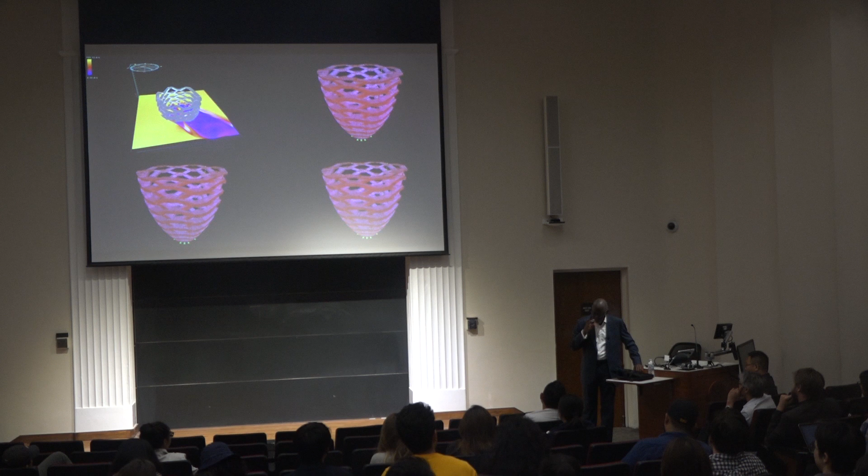And they reduced it from - I think we had about 700 people jumping at high pace - to something like about 200.